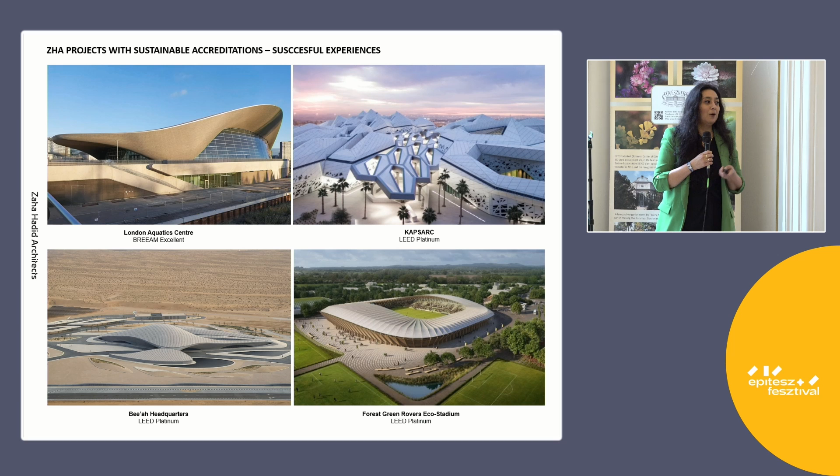Although we had some projects with very good experiences in terms of green accreditations, like the London Aquatics Centre, KAPSARC, the newly opened Bee'ah headquarters in Sharjah, and the project in progress now, the Forest Green Stadium, we were asking ourselves how a company with a global portfolio, with a language that is very well known, can include sustainable variables without losing our unique identity, which was the main challenge.

So we started asking ourselves, okay, where are we in this sustainability map? What are we doing for this? And how can we also educate ourselves to really learn what we are talking about.

Because of course, the terminology is something that everyone uses, but sometimes we don't really know what things mean. So with the help of Max Fordham, a sustainability consultant in London, we established a 2-year plan called the Low Carbon Strategy, with internal workshops to understand where we were with our projects and how we could improve.

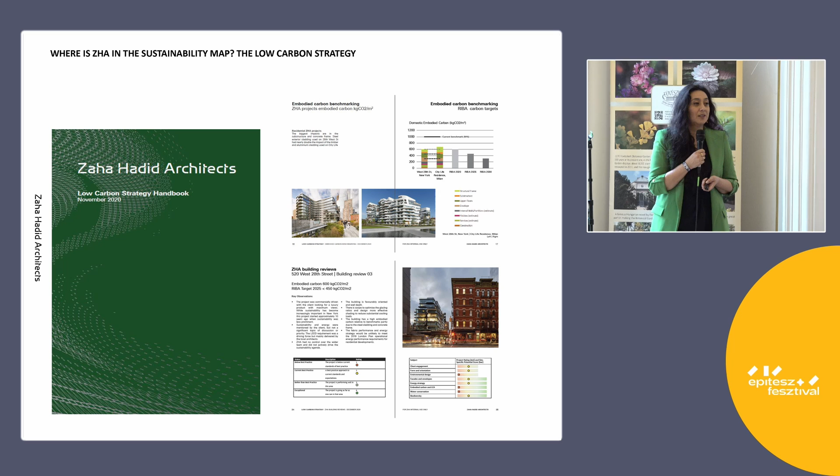The compilation of all that was a handbook, an internal booklet for everyone in the company, all the staff, to understand our successes and our failures as well in the projects and how we can continue progressing.

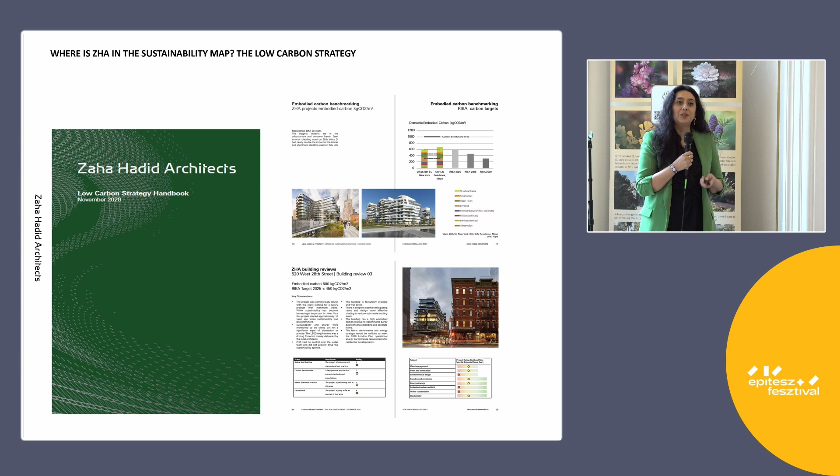The second part of this strategy was to set up an internal team, a group of specialists called Environmental and Sustainable, that were working with us since the very earliest stages. The transformation of the design process is really that one.

It's working with the sustainable requirements since the sketches, since the concept design, and not applying the technicality at the end of the project. This group of specialists helps us since the very beginning, working with wind simulations, daylight simulations as well, solar radiation, and use of sustainable materials.

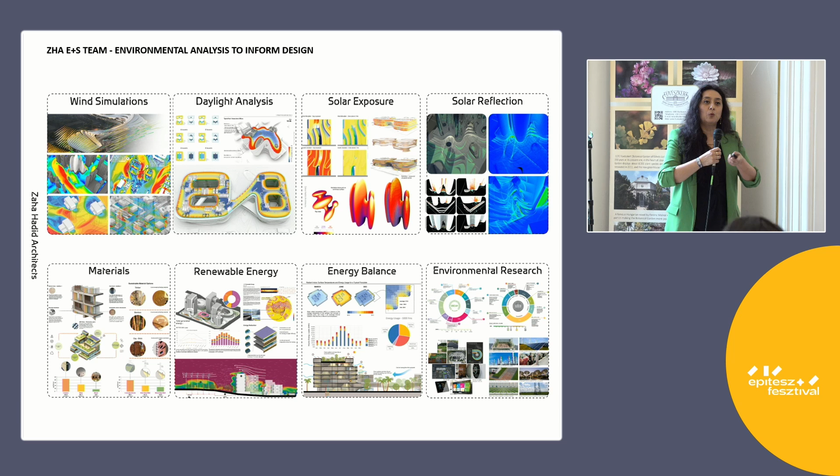So every time now that we have a project, we sit with this team, we work together, and we analyze the sketches, the way that we are positioning a volume on the site, and so on.

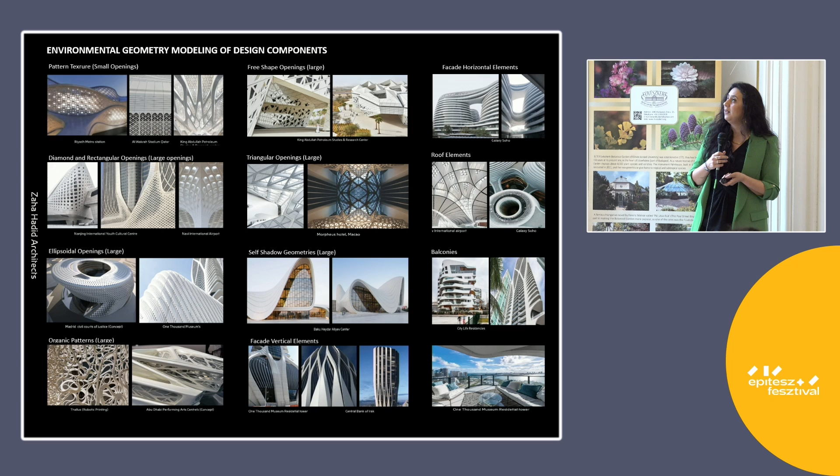Part of the result is, of course, a formal repertoire that helps us answer specific requirements in different climates with design solutions. In this case, mainly facade elements, vertical shading elements, horizontal patterns, balconies, self-shading devices, and so on.

However, we are a vanguard design company, so we didn't just want to have the assessment in terms of environment, but we wanted to design projects that have sustainability embedded in their concept.

I'm going to show you some of them. Of course, they are not perfect. Some of them are not built yet, they are in progress, but I think they are really nice attempts at incorporating all that I have been saying before.

So the first one is the King Abdullah Petroleum Studies and Research Center. This is in Riyadh. The importance of this project is that this is the first one where the team worked together with the engineers, in this case Arup from London, and also with Saudi Aramco, which is our client, to have an approach that was completely integrated.

The client wanted to have the sustainability issues addressed in the building, as well as us.

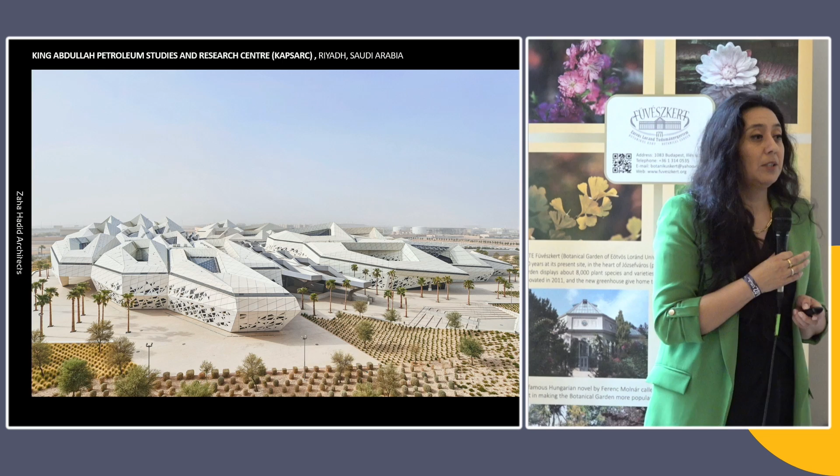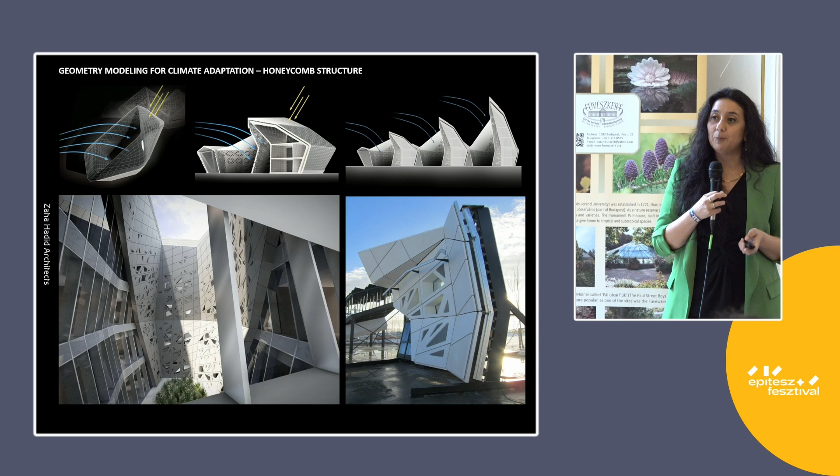This is a research center for around 350 researchers with 1,500 auditorium and breakout rooms, offices, and so on, distributed in 70,000 square meters. The most important thing about this was that it got the first platinum LEED accreditation for Zaha Hadid Architects, and the concept of the building was working with this honeycomb structure. The reason was that with the duplication of phases of having all these cells together, we could reduce the structure, reduce the material, and also the amount of surfaces exposed to excessive solar radiation.

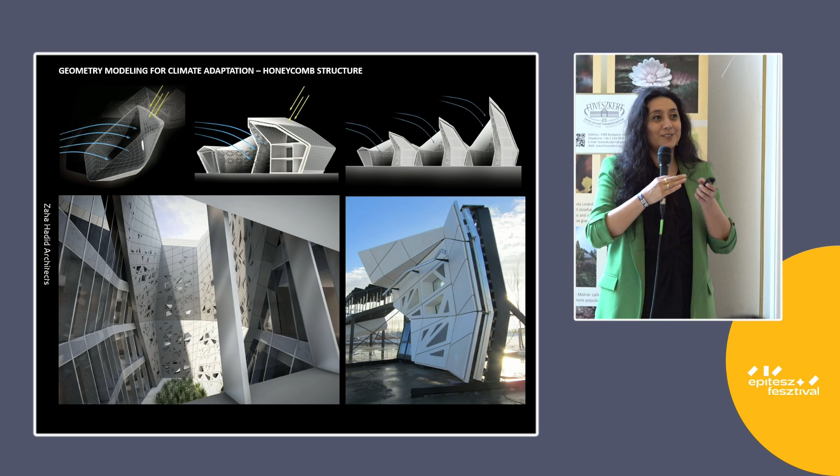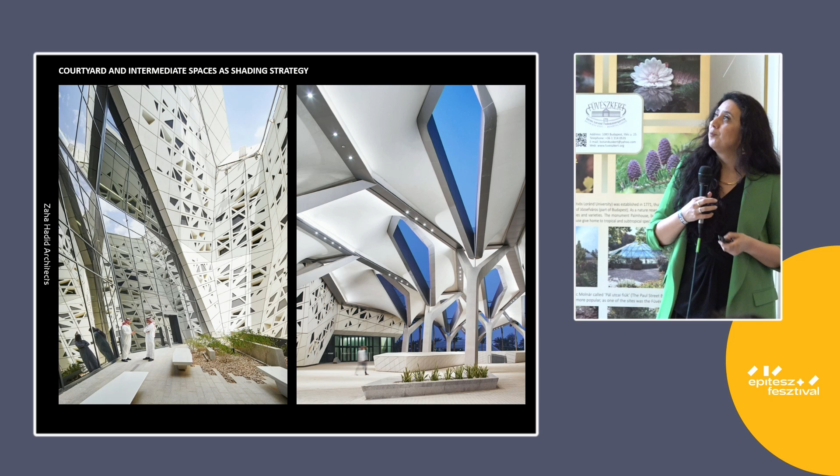At the same time, we tilted the skyline, the surfaces of the roof, to somehow scoop in and make the best use of the prevailing winds for the cooling inside. As well, we used the cells themselves as courtyards that can function as a system of self shading, both for the cell itself and for the adjacent ones.

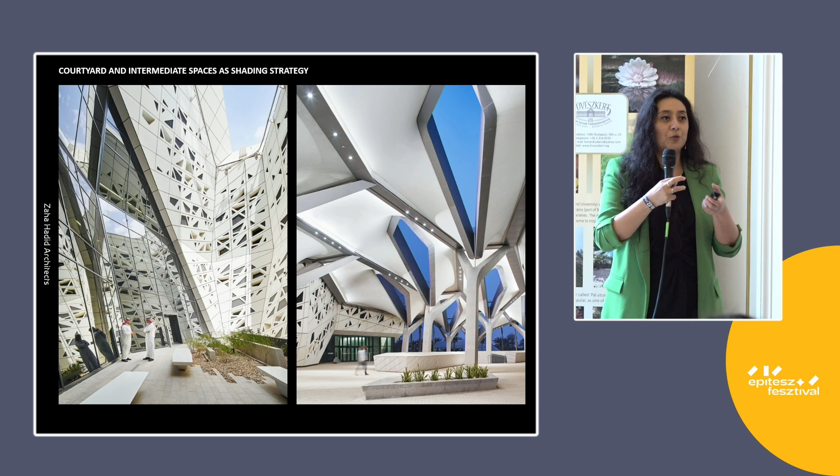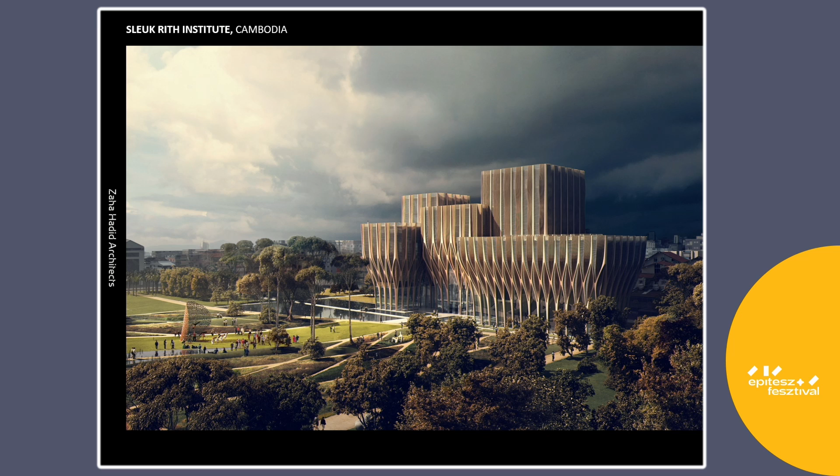The second project is also very important because it was our first attempt to work with timber. We generally work with concrete - most of the projects you could see from our previous years in our office were done in concrete. This one was the first where we dared to use timber for our geometry. Of course we couldn't work with such big complexity, but we wanted to achieve something beautiful and elegant like the rest of our geometries, while also being humble in the way we use the material.

This is the Sleuk Rith Institute in Cambodia. It is a project that has as its program a museum, a research center, and a memorial park for the genocide in Cambodia in the 70s.

In this case, beyond the use of the material, we also have the component of what we call social and cultural sustainability - giving the community a building that is completely open, with a lot of programs given to the community in terms of sport facilities throughout the whole park, as well as generating this duality for a building that has to host a program that reminds us of death, the shady part of human beings, but at the same time has to lift up your spirit and look forward to the future, in the case of the part dedicated to research and the school for kids.

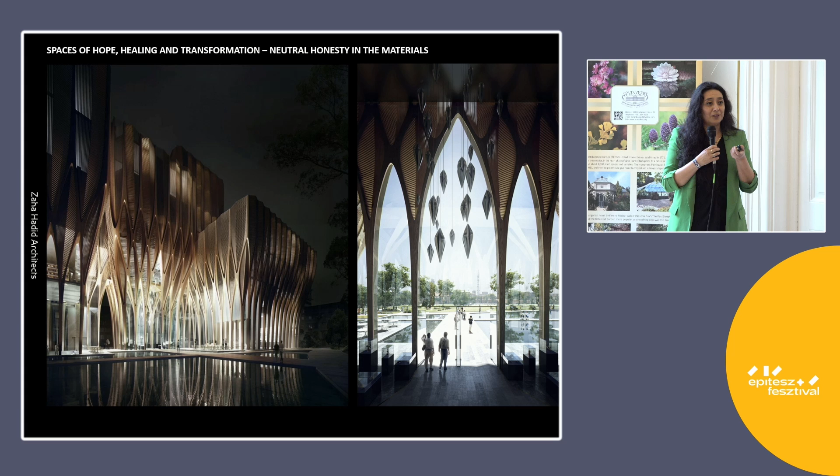So all of that was done with a lot of sensitivity in the way the spaces were designed in the interior, like you see in these images.

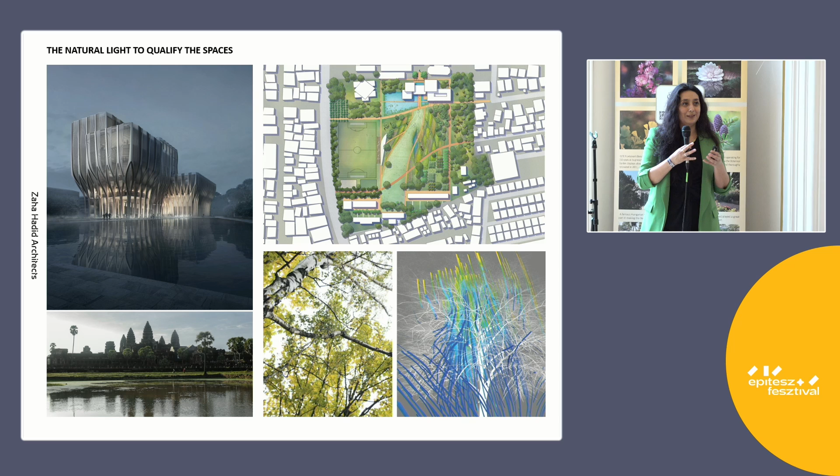This building, as I was mentioning, was also part of this whole development of the memorial park. So having areas of shade and open areas exposed to the sky was important in the park.

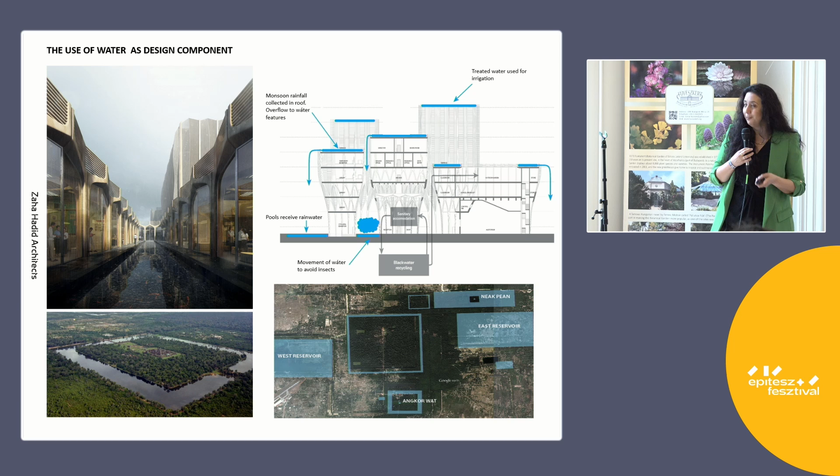The next project is the Forest Green Stadium. This has been named the greenest stadium in the world, when hopefully it gets built. Now we are in stage 3 of the RIBA process, and it has quite a difficult story. We won the competition in 2016. The planning permit was denied because, of course, it's not a common project to have a stadium that is completely made in timber. But then we submitted the planning permit again, and it was successful. So now we are working on it, and I'm happy to continue.

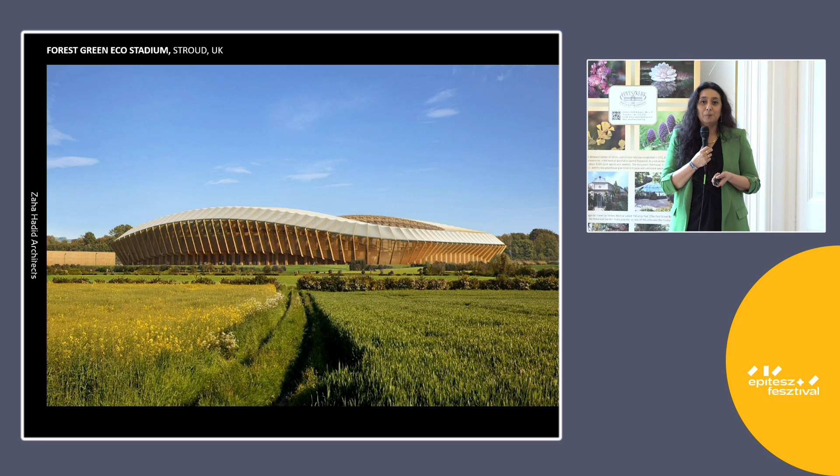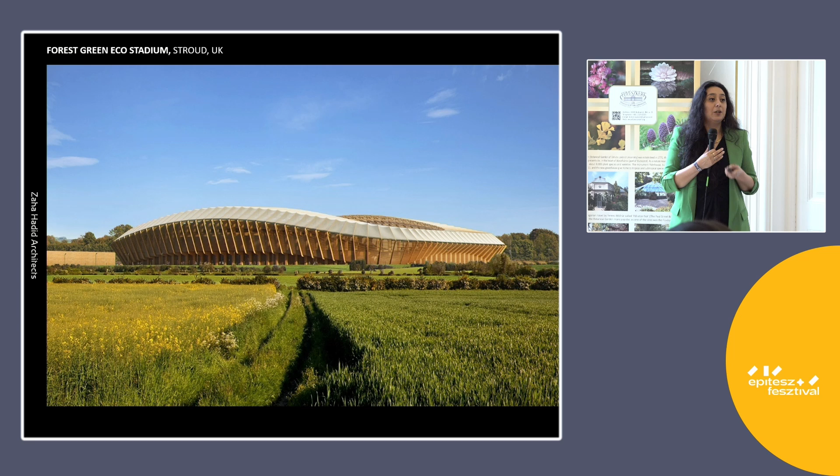The main idea of this project is being part of a park, an eco park. The client is a green energy entrepreneur, so he wanted to build this technological park that was also a green area for the city of Stroud in the UK, and make use of the meadow, the undulations of the landscape, to design the seating bowl.

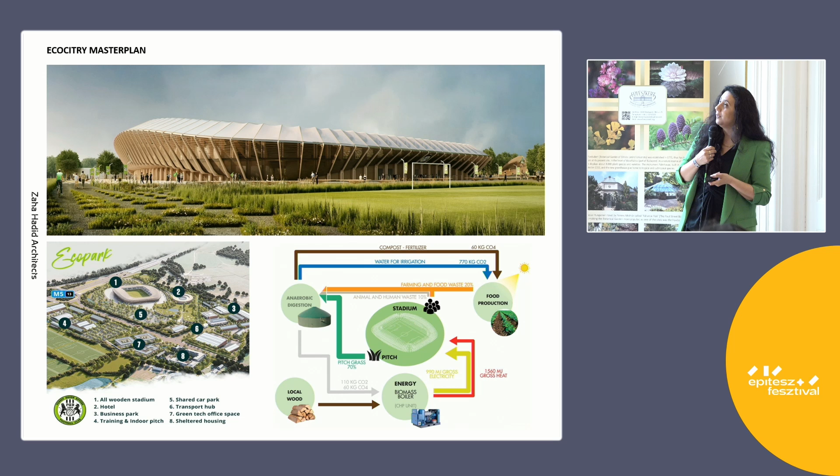So here you can see this stadium is just one of the components of this eco park. It also has a life cycle that needs to be virtuous, benefiting from the environment but also giving something back, as you can see in the chain of energy recycling at the bottom.

The way we worked on this to make it possible to build in timber is that the main structure follows a curve, a very gentle curve in the sitting bowl. So it's not a big stadium as a box, it's following the curve of the landscape. In that case we also reduce part of the structure.

The main elements are seated every 4 meters, which generally in a stadium is 7 to 8. The fact that they are close together allows us to also use timber for the slabs and for the raking system of the sitting area.

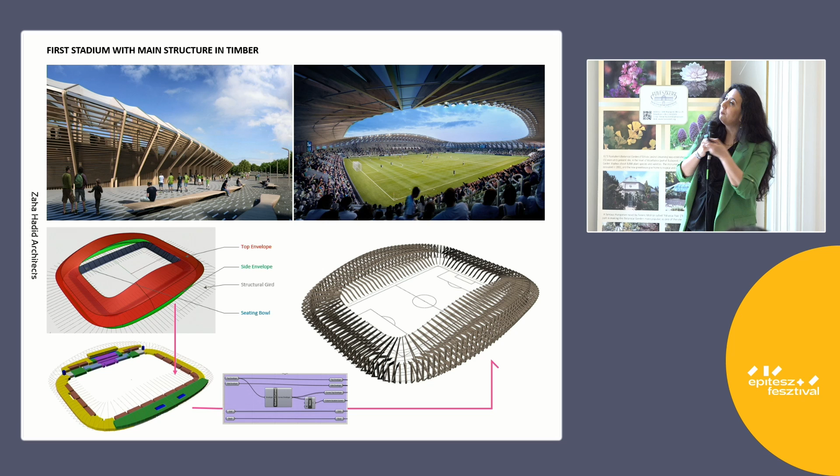All of this was done parametrically, as you could see in the sketches. This is how the section works, completely done in timber. The roof is done in glulam because we are trying to achieve this gentle curvature, but the sitting, raking, and slabs are done in CLT.

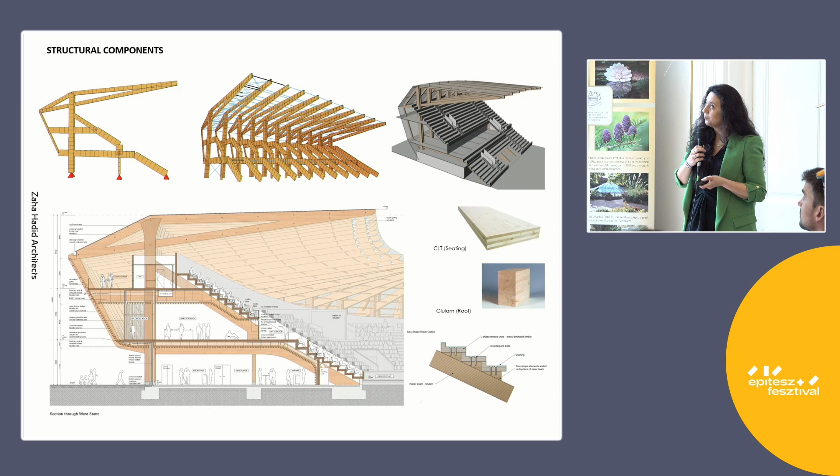The roof is covered with a transparent membrane for two or three reasons. The most important is to allow a high percentage of natural light to penetrate the turf area and allow the growth of natural grass. The second is to reduce the glare and reflection for the players.

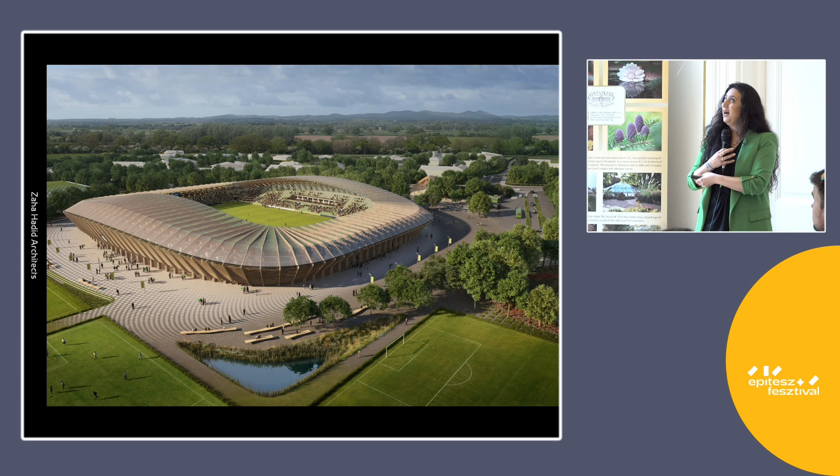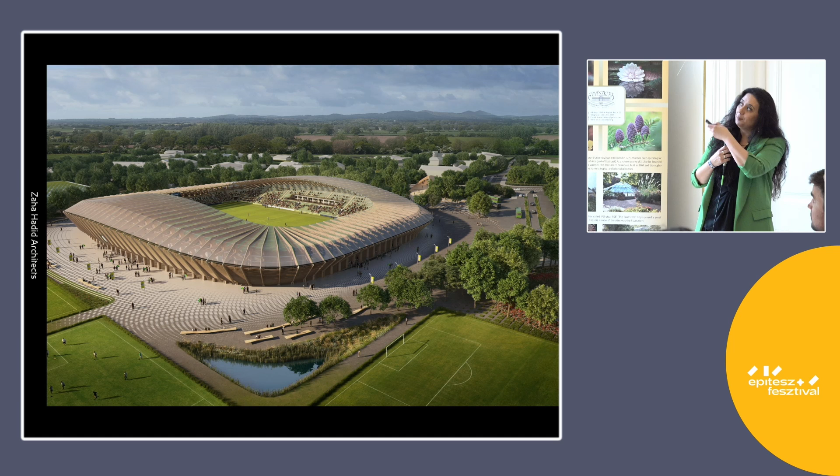The last reason was to soften the overall appearance of the stadium, in this case from the perspective of people circulating around the park. As you could see, all the areas around are also part of this development as a landscape design.

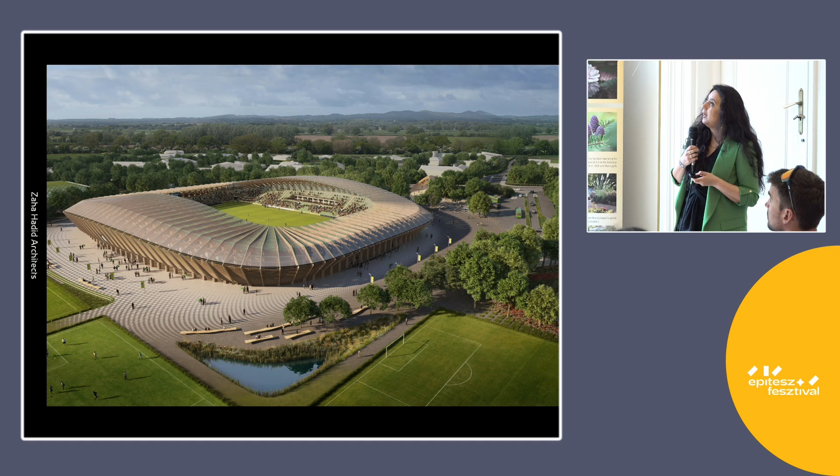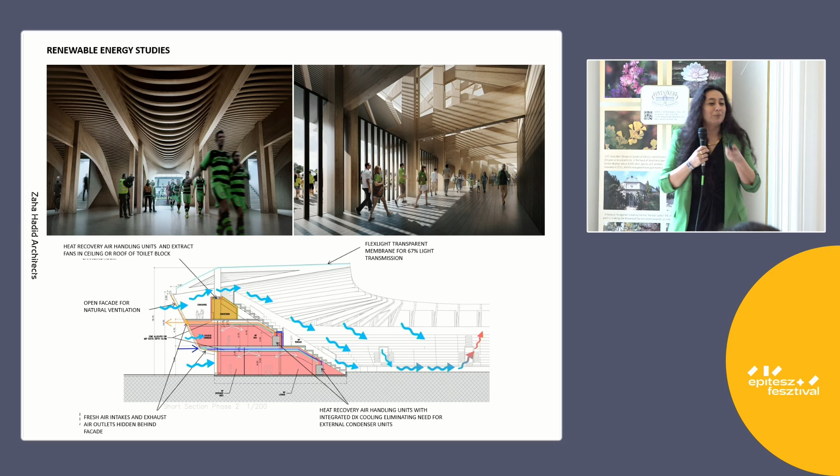The most important thing is how people feel inside this building, and how the rest of the facilities for the players are also made to human scale.

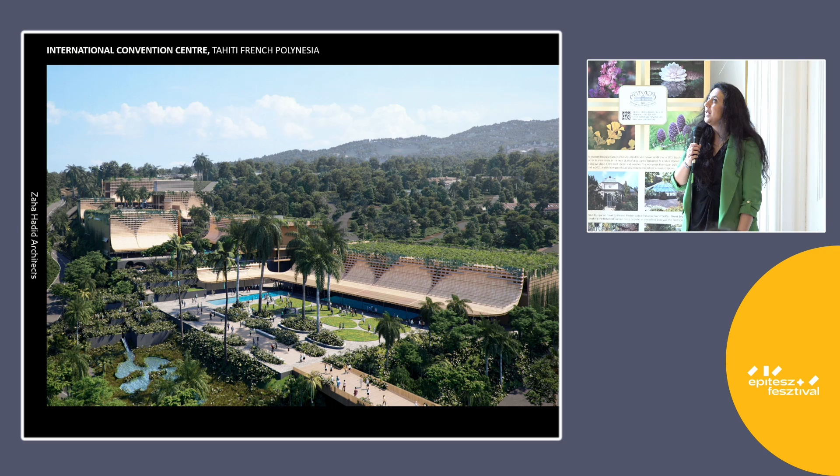The last project I'm going to present is the International Convention Center in Tahiti. This is a competition we won last year. It is a very interesting building because in this one we decided that sustainability would be at the core. We made something that is a reinterpretation of a village in the landscape, stepping down from a mountain into a lagoon.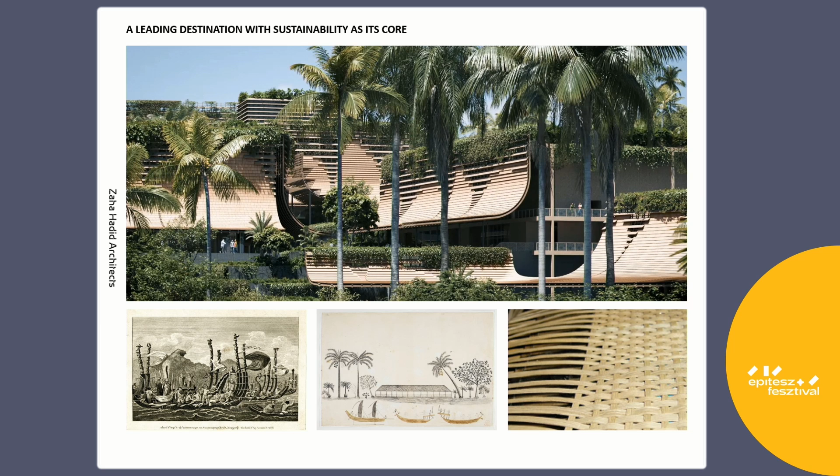We worked with references on this undulated roof, also made in timber, that refers back to the way the natives of the island used timber for their canoes, and the way they were navigating as well.

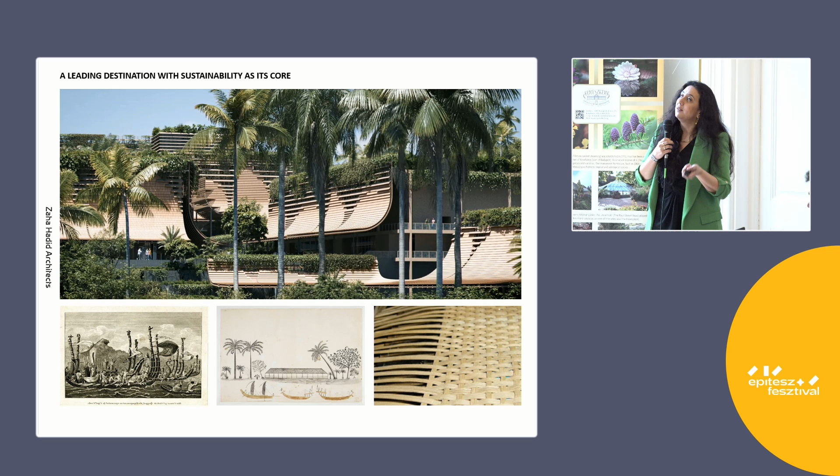Instead of having one huge building for the 4 theaters the program required, we broke down the volumes into 4 different ones using the natural stepping of the landscape, creating a series of green terraces. These are all naturally ventilated.

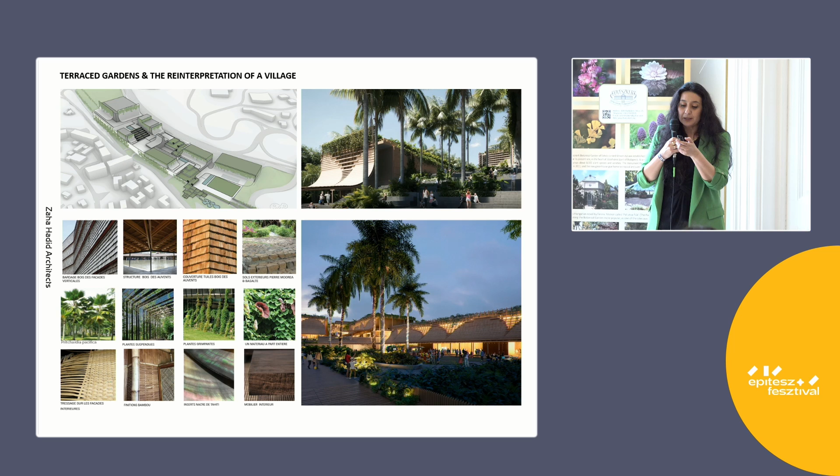They are open completely towards the landscape, making use of natural materials as well as the vegetation of the area. This is how the interior spaces relate to the outdoors.

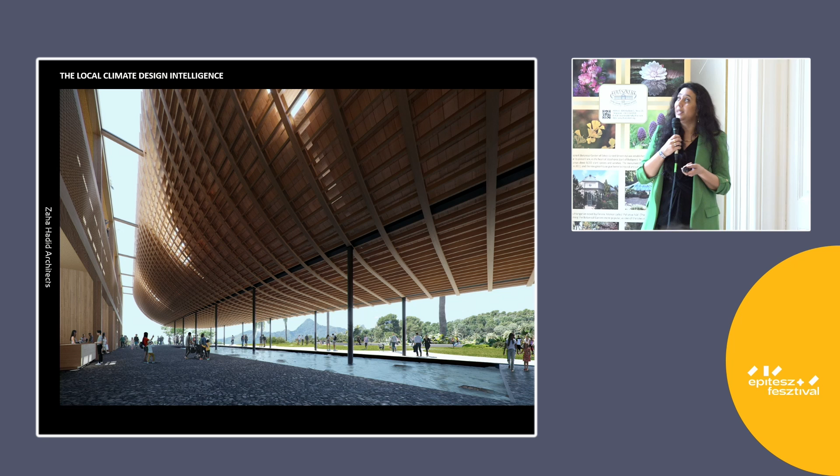In this case, the whole composition recreates the way villages are organized in Tahiti, how people can circulate freely between the spaces, and how the whole language of the project is unified by this curved roof.

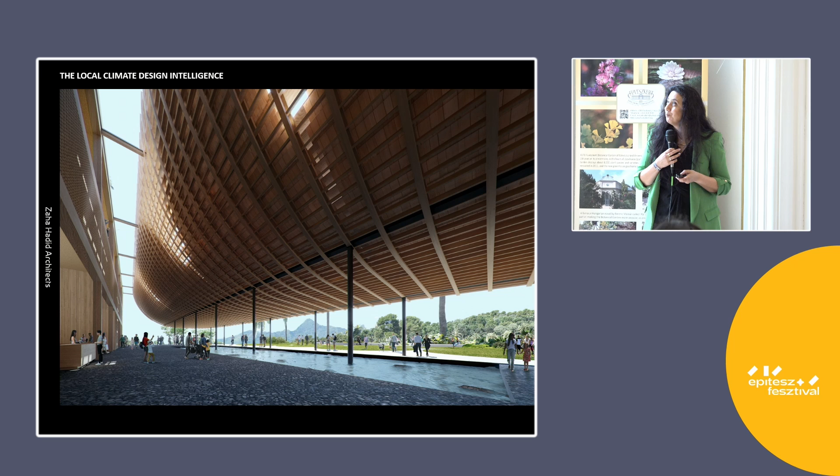Lastly, this project is not specifically based on nature or on the context of its place. It's something completely different, but I thought it was very interesting to show because it embodies the principle of reduce, reuse, and recycle.

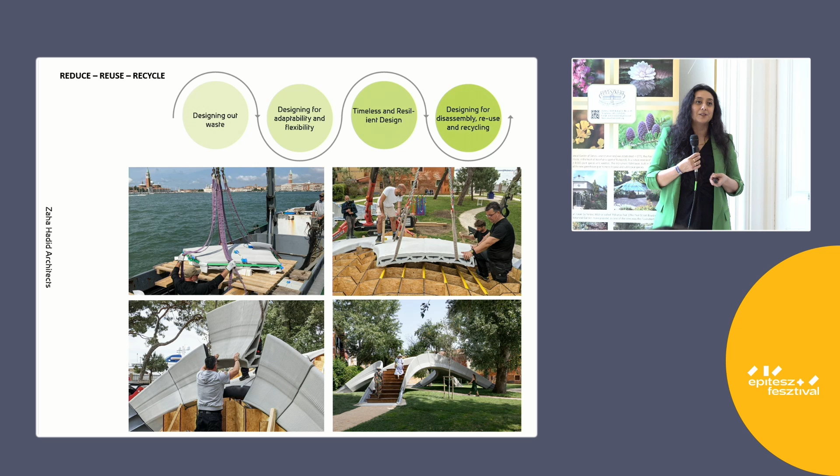This project is called Striatus. It is a bridge done by our research team. We have an internal team called CODE. The objective of CODE is to work on material innovation together with external institutions as well as manufacturers and suppliers, to understand how we can improve the use of certain materials for more sustainable solutions.

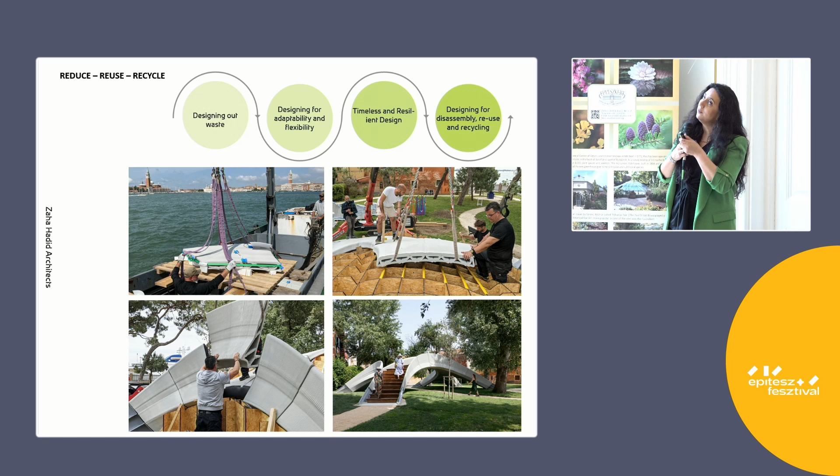This bridge is done in modules, printed in concrete. The pieces were designed structurally to be self-supportive, like all masonry arches, sitting on a skeleton made of timber. The advantage is that it can be assembled and disassembled, then moved once the event is finished. Also, because the materials are not mixed, it can be completely recycled.

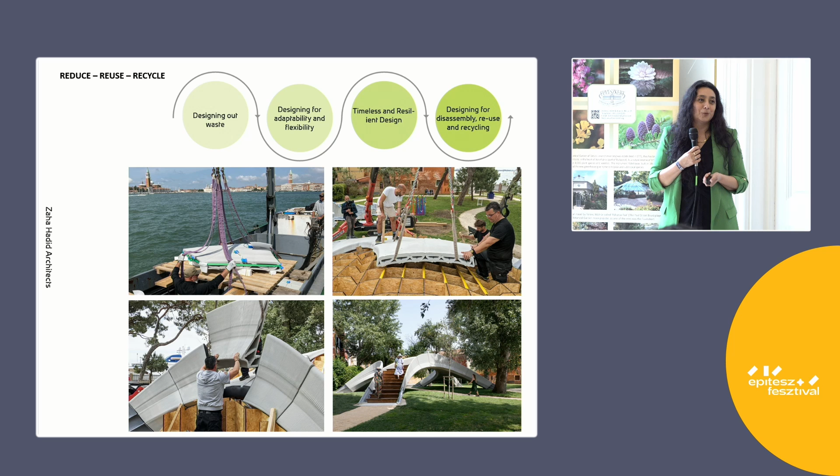I think experiences like this also help us understand how we can better improve our design and arrive at better solutions. Thank you.